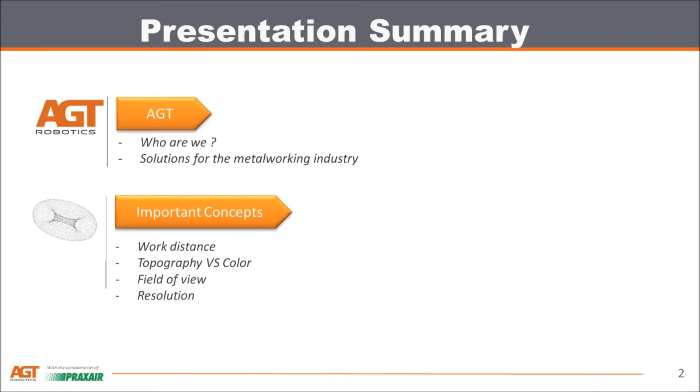So back to today's webinar. What we have for you today is we'll present a little bit, a few minutes on AGT Robotics, who we are, what we do. We'll go through a few important concepts for 3D vision, go over a few 3D technologies like cameras and scanners, and give you a few examples of 3D vision. On top of that, we'll also show you a few examples on how we use vision for welding applications, for example seam tracking or seam finding.

See, hello? So I don't know, we might have a few sound problems at this time. Okay, give us a second. We'll just figure out if people can hear us. Okay, so I think this is good. So we'll continue on this.

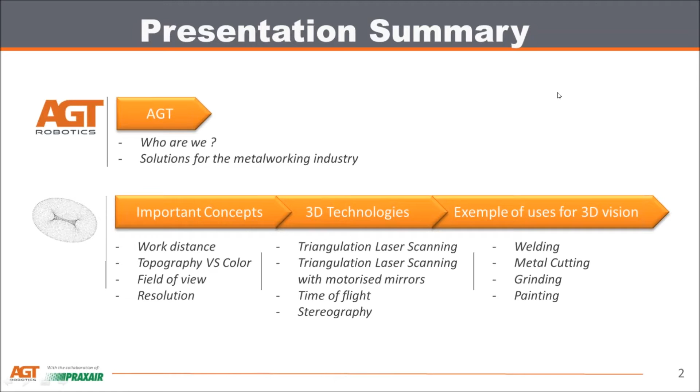So a few words about AGT Robotics. We are in business since 1992. We have hundreds of automated systems installed in Canada, USA, Mexico, some soon in Australia, in Europe. We have two plants, one an hour east of Montreal and another one where we have programmers working in the Montreal area, and a large network of partners. Today the seminar is also sponsored, done in collaboration with Praxair, who distributes all of our product and custom solutions in Canada.

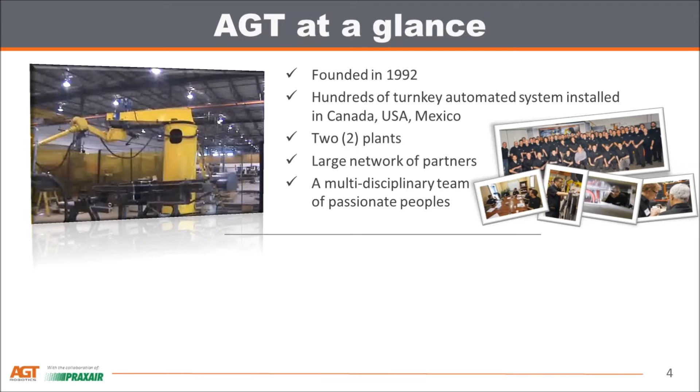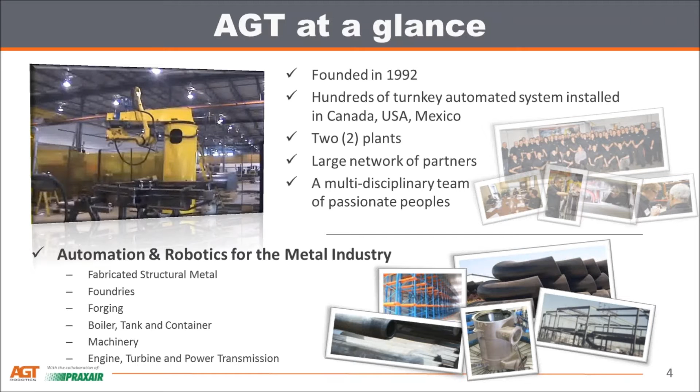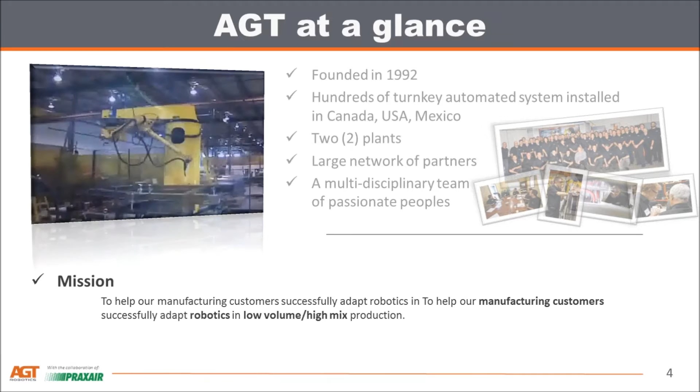So our main focus is for the following industries: the metal industry, fabricated structural metal, foundries and forging, boiler, tank containers, pressure vessels, heavy fabrication, machinery, and engine, turbine, and power transmission. Our real focus and mission is to help our manufacturing customers successfully implement robotics, especially in low volume, high mix production. That is where vision systems take all their meaning, since you can use a vision system to look at the part and basically adapt the robotic path based on what the system just saw.

So I'll guide you through a few important concepts in 3D vision. The first concept is topography versus color. If you have only a true 3D system, it will sense dimensions, so X, Y, Z. But if you want to look at color, you need additional sensors. Some sensors do both, but at its core, it's only doing 3D representation - a point cloud or 3D image where you have no sense of color. When you see an image like this, with a color map, the system doesn't actually look at those colors. This is just a map for us humans to look at the 3D image and have a better sense of what is high and what is low. So in this example, red is high and green is low.

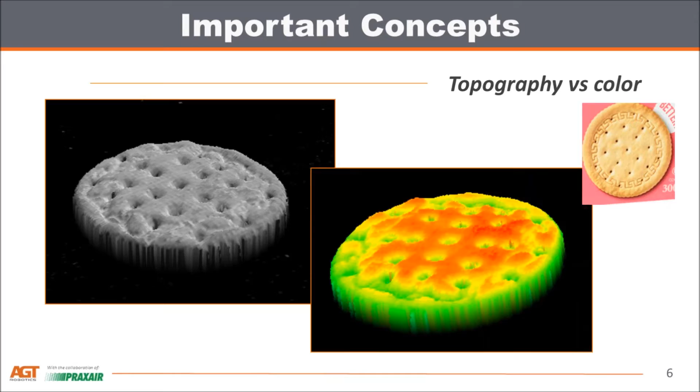Another important concept is working distance. Unlike 2D cameras, where you can see an object really close to the camera or really far from the camera, most 3D sensors will work only at a certain range. For example, since it's a triangulation between a sensor and an emitted laser, there's a minimum distance where you actually see nothing, because the laser has to hit the object in order for the camera, which is at an angle, to see it. This is also an important concept when you're trying to find the right technology for the application.

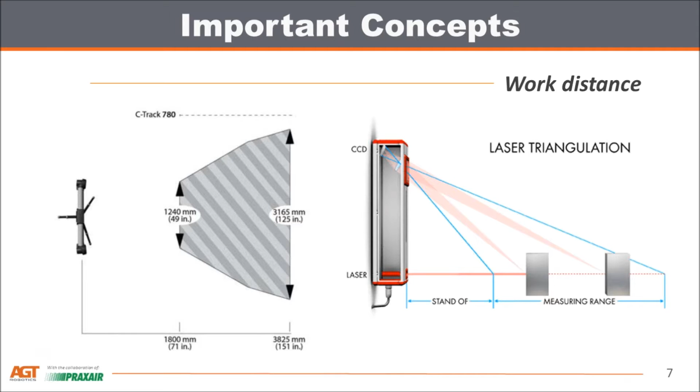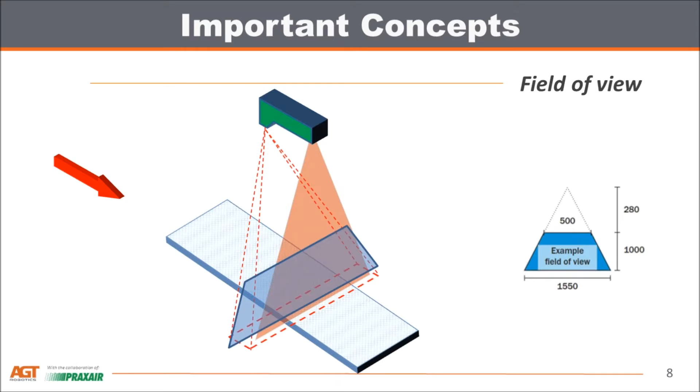Another important concept, of course, is field of view. The same camera, the same sensor, put at a different distance, can see a different field of view. The example I always give is if you look at your iPhone or smartphone, even though it's just a 2D camera, you can point it at a certain object and see only close objects. With the same camera, if you position it differently, you can look at an entire city and do a different job. Of course, the resolution will be different, and that's our next concept.

Resolution. There are many types of resolution. You can use the native resolution of the CCD in the camera, or the spatial resolution - basically, in real life, what is the minimal feature you can detect. This is probably the most important feature. If you're trying to follow a joint in welding, you need a pretty good, probably sub-millimeter resolution in order to correctly guide the process. If you're looking at other applications where you only need a few centimeters or even a few inches, then it's a different story. The same camera could have a different field of view, thus a different spatial resolution.

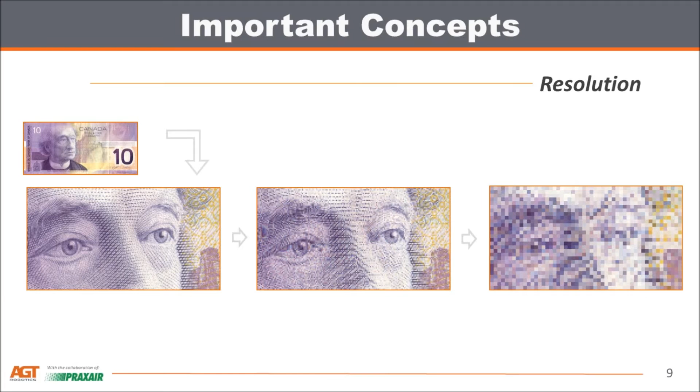A few 3D technologies are available. Once again, same thing with resolution: there's not a better resolution than another one, you just need the right resolution for the right application. Typically, the more resolution you have, the higher the cost will be, like a TV, and sometimes you don't need it in a certain application. Same thing with 3D technologies: there are differences between them, but you need to find the right one for the right application.

First technology, probably the most used, is triangulation laser scanning. Basically, it automatically analyzes the distortion of a projected laser line on a moving body. These are really fast technologies, pretty easy to adjust. Some 3D cameras come with already pre-calibrated systems, and it's really suitable for industrial environments. The con side is that it requires controlled motion and great computing power.

When we say controlled motion, the example I always give is for those of you old enough to have seen fax machines or photocopiers: you need coordination between the movement and the scanning unit. If you move the page on a photocopier while the system is moving the scanning device, you'll get a distorted image, and thus probably bad results in an industrial system. Industrial systems work exactly the same way.

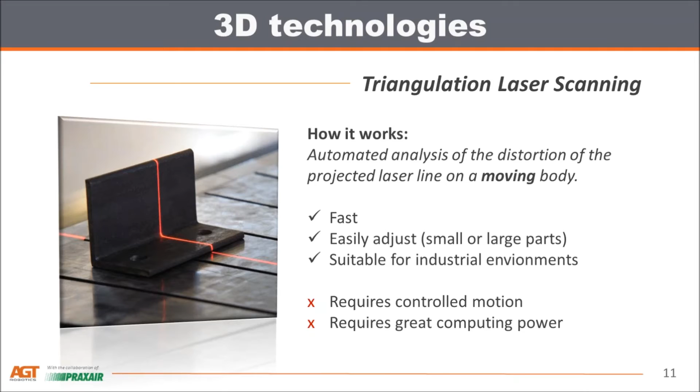Another technology is time of flight. That is a quite new technology. Basically, it creates a point cloud by emitting a pattern of light and then calculating the time that pattern takes to come back. For each point, it uses a known factor, the speed of light, and generates a point cloud associated with it.

They're very nice features: the fact that it's very fast, so you get 60 point clouds, 60 3D images a second. It can work with really long working distances, up to 10 meters, and it's really suitable for industrial environments. It's actually the technology used in Microsoft Kinect, for example, and it has a lot of applications where resolution is not needed, because the con side is that it has very low resolution, typically 160 by 120 pixels. So if you look at a pallet, for example 48 inches by 48 inches, it's typically sufficient for palletizing applications, but would not be sufficient to do seam tracking or find a joint. Roughly, it has a precision, especially in the z-axis, of plus or minus 1 centimeter.

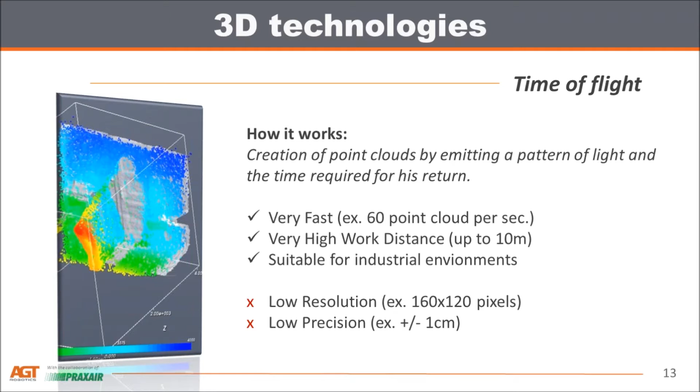There's a new image every 1/60th of a second, so it's quite fast to have some good feedback.

Another technology is stereography. Basically, it's two cameras looking at the same object from a different perspective. That technology really tolerates different surface finishes, and it's quite low cost because these are pretty standard cameras. However, it requires great computing power because you have two images coming in and they have to figure out what are the common features in both images, and that way they can create a 3D image.

Also, the most important thing is you need a geometric landmark in the subject. For example, if you would use a stereographic camera just to look at a white wall, it would probably be the best setup for a laser scanner or even a time of flight, but the worst one for a stereographic camera, because there's a total white surface with absolutely no geometric features in it. So the system cannot look at the same feature and compare it, so it's more difficult. But it has some applications where, for really complex objects, that can be a really nice technique.

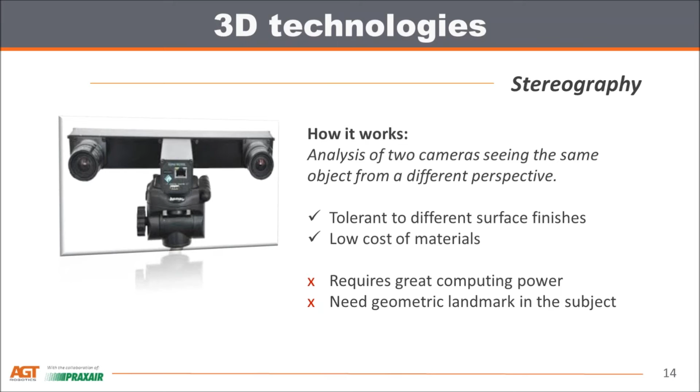There's also the white light 3D scanner, mostly used in metrology for inspection purposes. Basically how it works, it will analyze the deformation of a pattern of light projected onto a part. Typically, that's the technique that will provide the highest spatial resolution with a relatively high field of view. However, once again, it requires great computing power.

Some of you may have heard of body-in-white inspection. It has a low tolerance to surface finishes. Sometimes you actually have to paint the part in a different color, usually a very matte white, in order to make it work, and the part must be static. Also, these are very expensive techniques. As I said, they're mostly used in the automotive sector for metrology purposes.

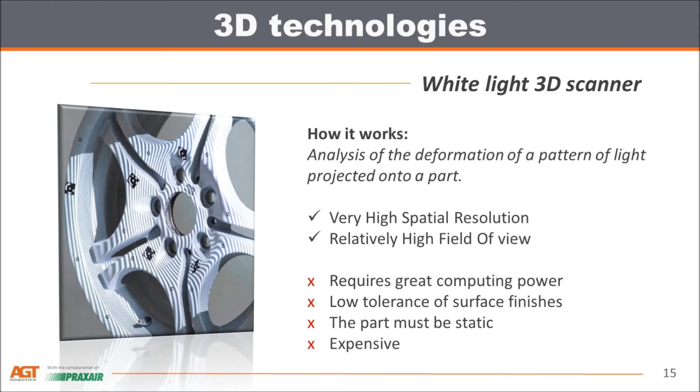A few applications that AGT has done in the past using 3D vision. I'll show you a few.

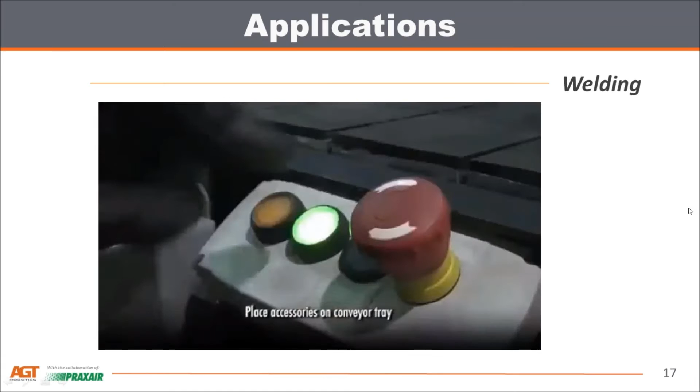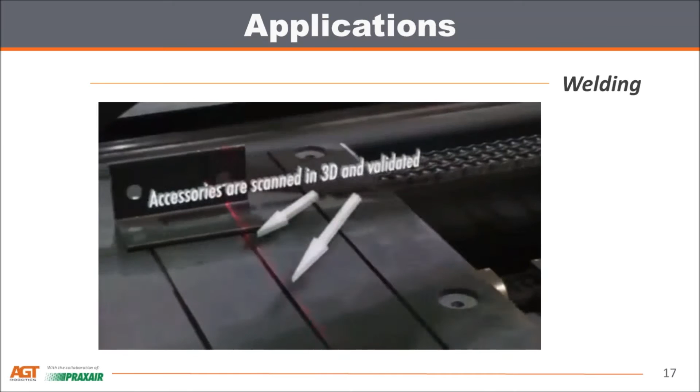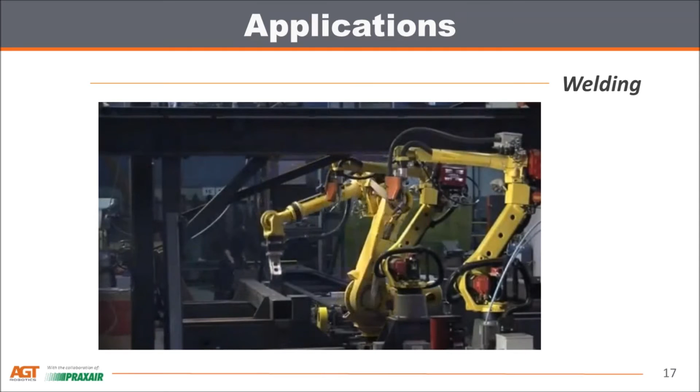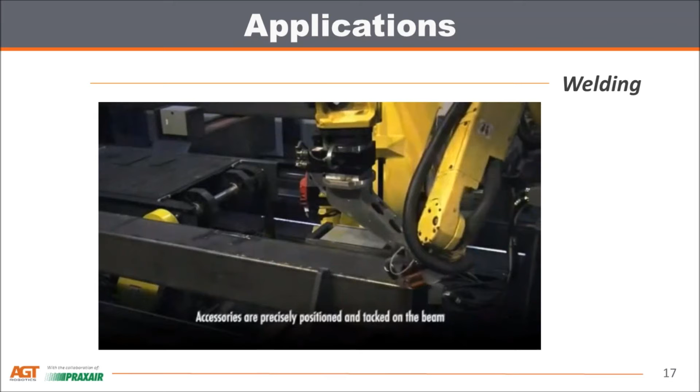First one is the Beammaster Fit and Weld, a complete 3-robot solution where we import the information from a 3D CAD, and all the operator has to do is provide steel to the machine—beams on one side, as you can see, and the accessories on the other. In order to compensate for the fact that the robot trajectories were generated using perfect information in the CAD, we have to scan both the accessories and the entire beam in order to adjust all the programs and actually position the accessories at exactly the right position on the beam. All the movements you see there are done entirely automatically and were generated by software developed by AGT Robotics.

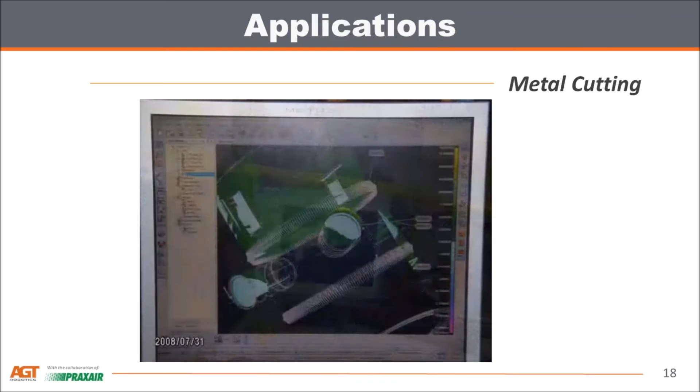Another application—this is actually a prototype unit. The real one is a little bit confidential in the way it works, and it's installed here in Quebec, and it has been in production for almost 7 years now. Basically what we do is use, once again, a laser scanner to scan the entire part, and then modify all the robot trajectories that were programmed using an offline programming tool in order to compensate for the tolerances of the real parts.

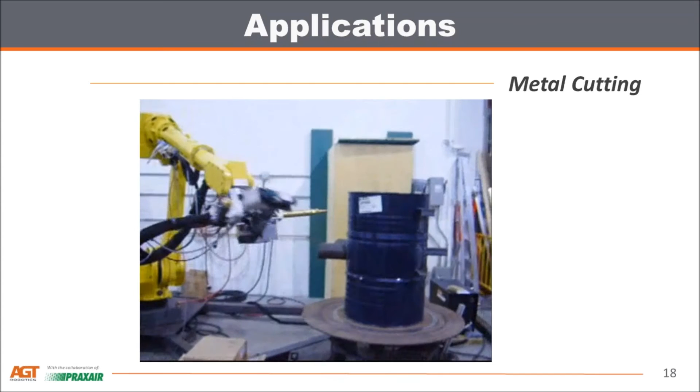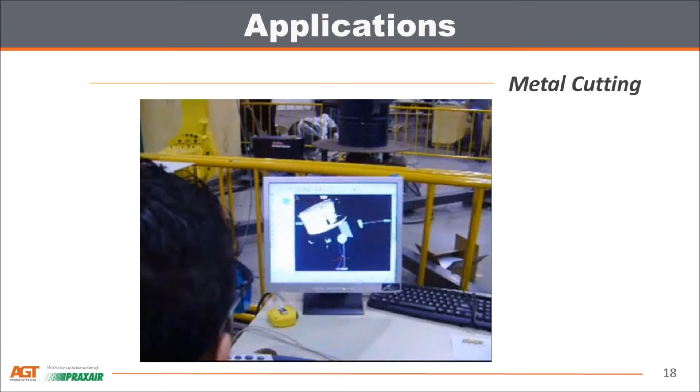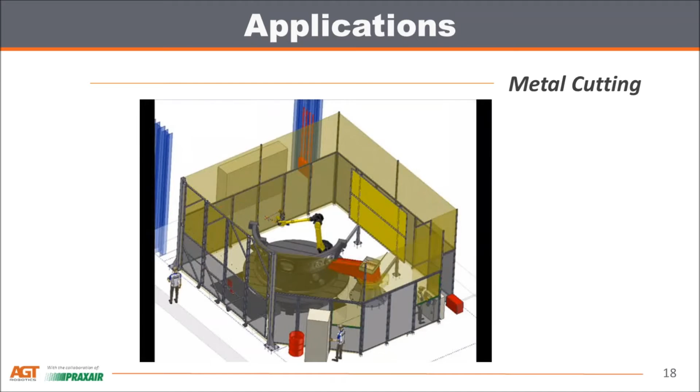In that case, the real part is much bigger, probably a diameter of close to 20 feet, with a huge turntable instead of that small one. Basically it's a hydraulic turbine, and the system will scan the entire hydraulic turbine, which will take many minutes, and then crunch all the data to generate and modify the trajectories.

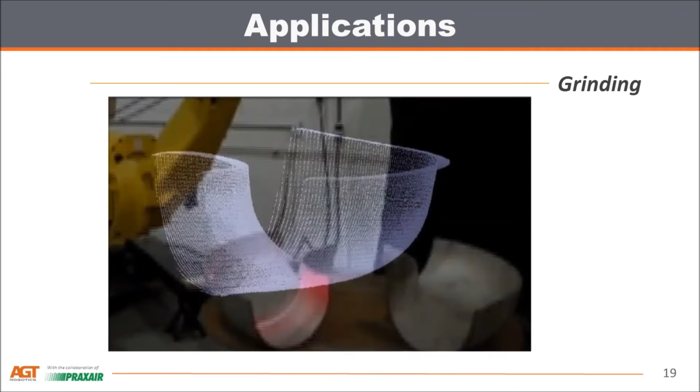So that's another application. Another one, once again, using 3D scanning, also for a good mix of resolution and cost.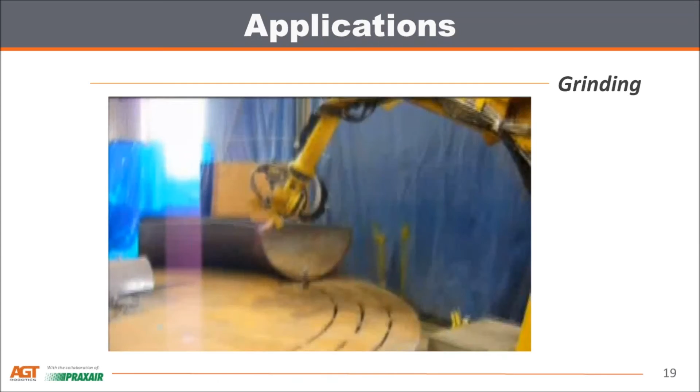Basically what it does—these are steel elbows, and the system scans side A and scans side B and automatically generates the cutting trajectory custom to each part, because these are forged parts, and while they're being forged, they get quite out of dimension. Before that company bought the cutting robot, they had tens and tens of hours of grinding time just to grind part A, grind part B, test them, re-separate them, then grind some more, mark them, and so on. So it was a huge amount of time just to fit them together and prepare the parts for the last step, which is welding.

But now, basically, they wanted a grinding robot, and we sold them a cutting robot, because we said if we add 3D vision to it, instead of just grinding, measuring, and grinding some more, we can virtually fit side A with side B and generate the custom robotic cutting path that is right on the first try. That's what we did for that.

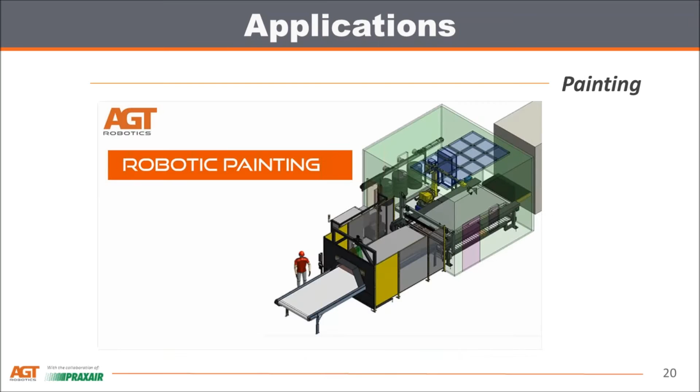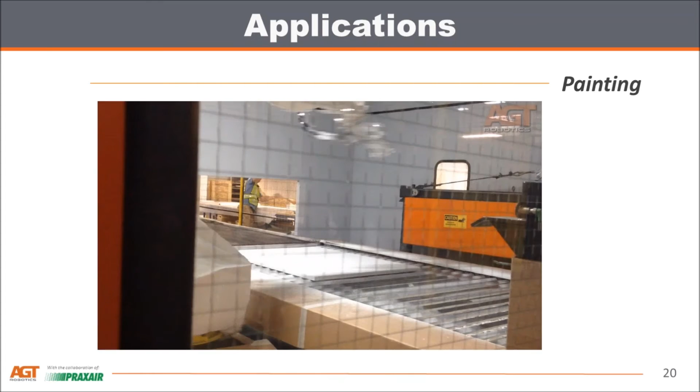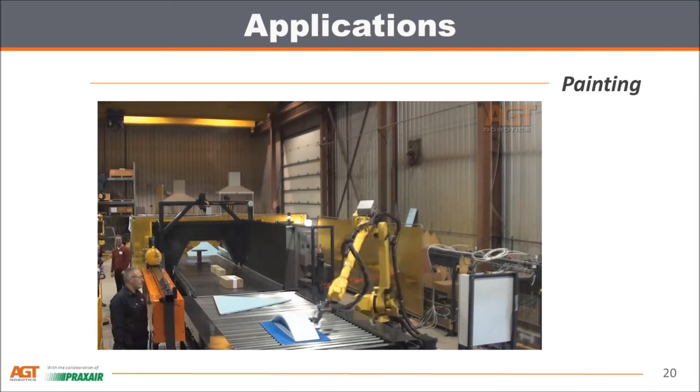Another application for using a laser scanner. This was an inline application for painting. Parts are dropped on a conveyor pretty much randomly, and the system will scan in 3D and generate on the fly, every 30 seconds, a new painting path that will cover both the contour and the surface, done in both the x-axis and the y-axis. This has many applications for painting, but we can also use the same technology for other applications.

If we go back to welding, one of the most important things, apart from applications where you have a jig and the joints are exactly at the right position, is that in low volume, high mix, you typically want to avoid the use of jigs. If you avoid jigs, the accessories can be at different locations, but they have to be within the right tolerances. Sometimes tolerances of plus or minus 1/16 or 1/32 of an inch are enough to make the difference between a poor weld and a quality weld.

Typically, before executing a welding routine, a robotic system has to find the right joint at the right spot. There's the jig technique, where the robot can start immediately. There's also touch sensing or nozzle sensing, which are quite common, where you use the wire or the nozzle to find the side walls and the base, then modify the robotic program to execute the weld. But what I'll focus on today, in the last 4 or 5 slides, is that we can also use 3D vision to find the joint.

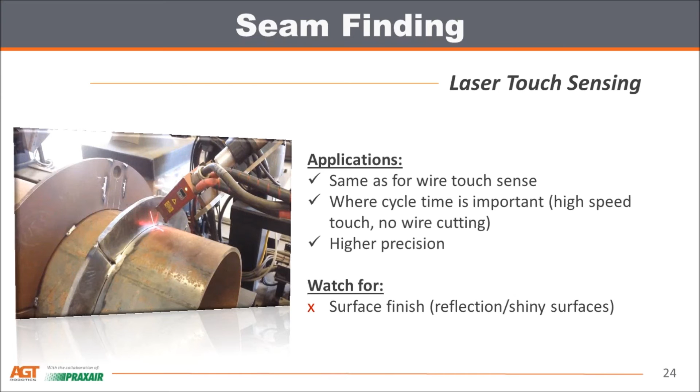This application is pretty easy to integrate, and it can be faster than touch sensing, and you can also be independent from the welding source. Something to watch for, of course, is surface finish. If you have a very reflective surface, it could lead to problems, and that's actually true for any 3D camera using sensor.

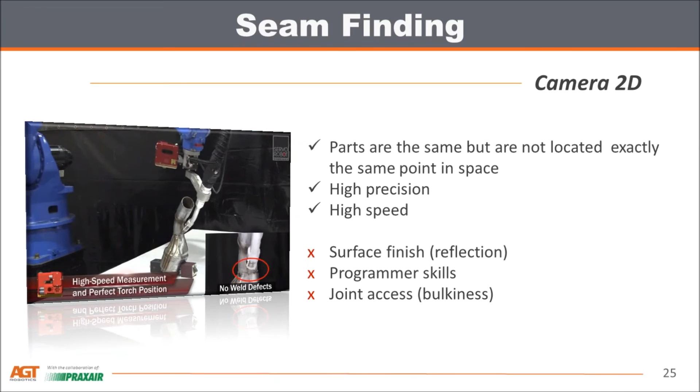You can also have a 2D camera, but used in a 3D way. Instead of just focusing on one dot, you have an image of the entire area, and once again, the part doesn't have to be precisely located. So this is really a high precision and high speed application. Things to watch for: surface finish, programmer skills. You have to position your camera to have the right field of view, and of course the joint access—the more cameras and boxes you add around the tool, some joints you cannot access because there would be a collision between the camera and the part itself.

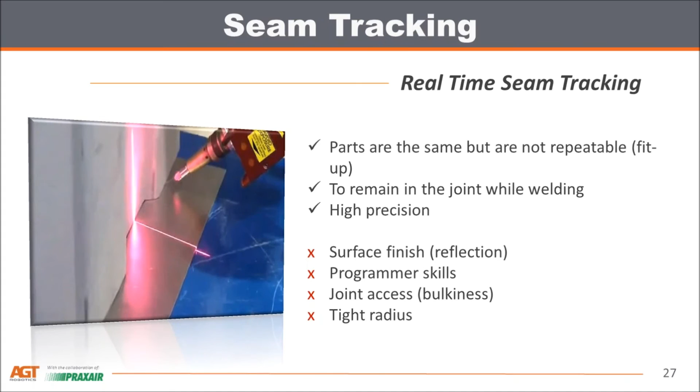You also have real-time seam tracking. Basically, it's a 3D laser scanning that always looks a few inches before your welding torch, and tells the robot what's coming. If you have really long joints where the parts are similar but not really repeatable, that can be one of the good techniques to use. It helps the robot remain in the joint while welding. This is really a high precision technique. Once again, surface finish and joint access are things to watch for, and if you have a really tight radius or sudden changes in the joint, that can cause problems as well.

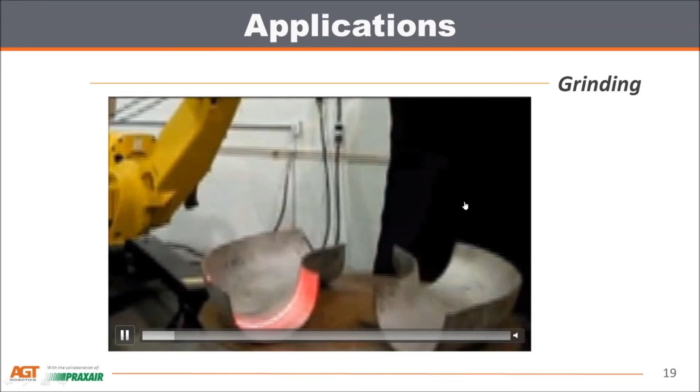In the video, you'll see at one point we have an HMI where we ask the operator to enter the right data, because they absolutely had no CAD for that application, but they had thousands of combinations of radius, diameter, thickness, type of material, and so on. So we asked them to provide information on the green, red, and orange areas, and from there we would do a match between scan A and scan B, using some 3D libraries to find the right path that would optimize the fit between the two sides.

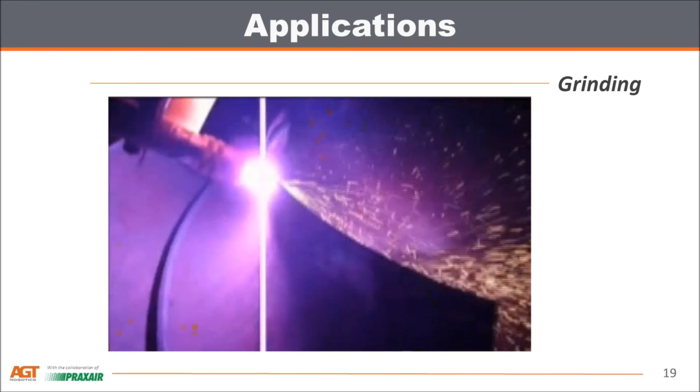So it was our own development in terms of using off-the-shelf libraries, but we still had quite extensive work to do to analyze the point cloud and come up with the right solution.

So just to be clear, this robot is scanning the raw part, plasma cutting bevels, and then finish grinding the slag to meet its mating part's profile, right? Exactly. And all that with the tool changer, so it's the same robot that will drop the scanner, go pick up the plasma torch, drop it again, and change it to the grinding wheel for the final deburring.

Wonderful. Okay, thank you.

Okay, I have another question. People ask how to define what is the most appropriate vision technique for a particular product. I think it all starts with speed, cycle time, and the actual mechanical setup.

Sometimes even if the part is static, you want to consider things like the 3D scanner with a motorized mirror, which has a certain field of view. If it doesn't cover all the part, you have a choice: you can move the part, rotate it to a second station and take another snapshot, or you can duplicate the scanner, or move the scanner like we do, as you've seen, to add the passes together with the robot.

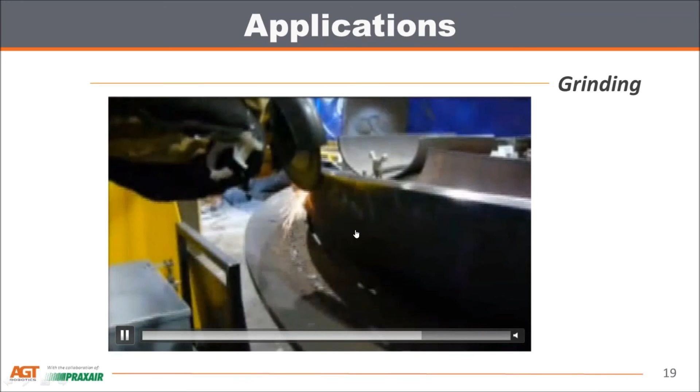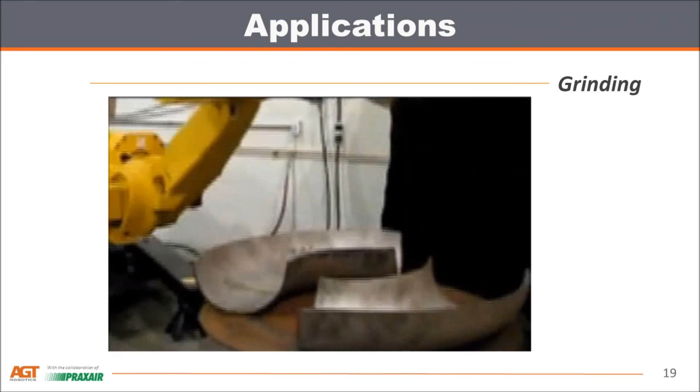We actually move the scanner to add the passes together with the robot. Or for a really fast application, you could have an array of 2, 3, or 4 cameras that just snapshot the object together.

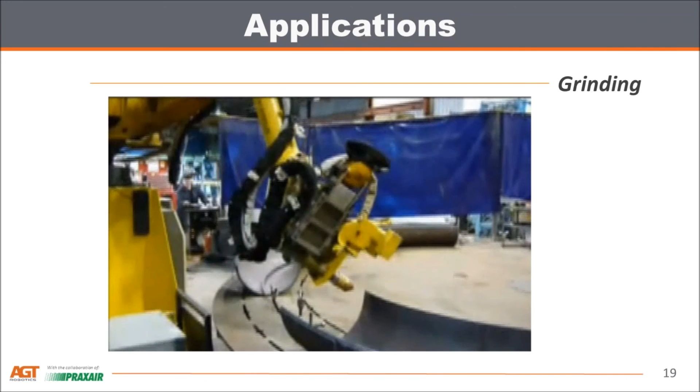So part of our expertise is to juggle with all those techniques, since there are pros and cons. Sometimes we can go from one setup to another, and sometimes price or resolution can be an issue. So there's basically the concept I've mentioned—sometimes there's 2, 3, or 4 different setups that are almost as good as one another. That's a little bit how we decide on a vision technique.

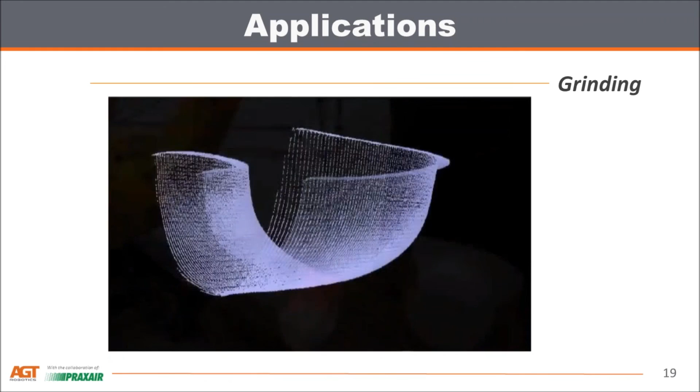Sometimes some vision techniques will eliminate themselves just because they're not fast enough, but that's part of the things we do.